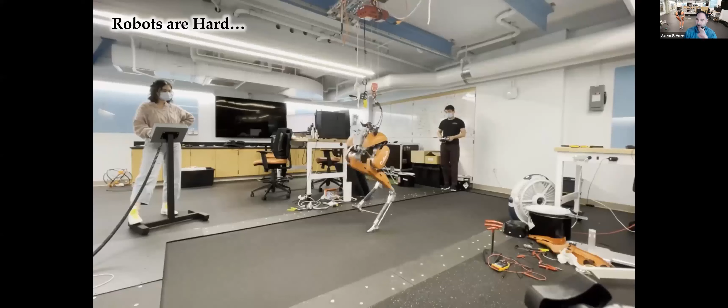And this is just some of the outtakes testing on Cassie. Either Cassie falls apart or Cassie steps on itself, or just things start falling off it. And they're just really difficult. Both, these are mechanical failures. There's also, of course, a plethora of algorithmic failures. Those are, in fact, the predominant failure mode. And the bottleneck in robots is the algorithms we're deploying on them.

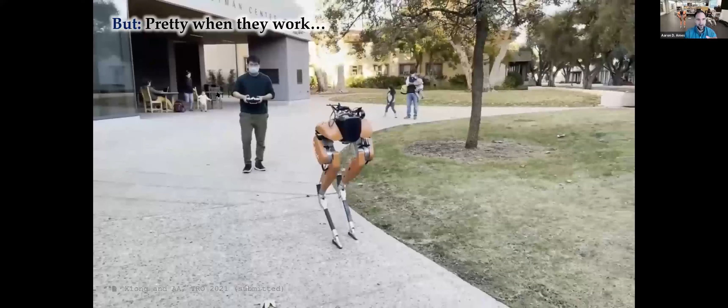But it's cool seeing where you can ultimately go with these things when everything works the way it should. It's also cool seeing kids' reactions. There's a little shot here of a kid just running around the corner trying to track down the robot, super excited about it. So kids love robots. All right, so that's kind of the lesson here, is they're hard, but they work.

So what's the challenge? Well, the challenge is really to make them work every time, all the time, properly. I think of this as our canonical application space in terms of getting things to work all the time. So Mars.

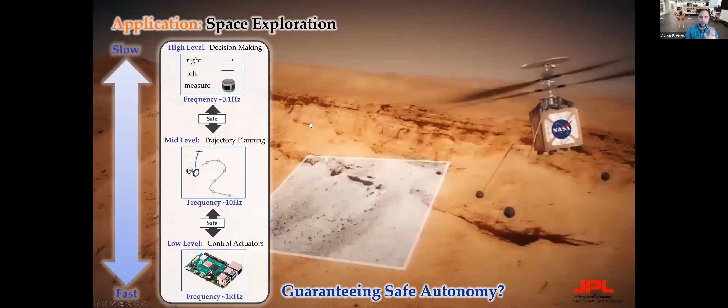I had a project with JPL on this coordination between the rover and the helicopter. It's not on Mars, but it was a proof of concept study for perhaps the next mission. The idea was, we're developing all these autonomous behaviors on this system. How do we know that when we deploy them, they'll actually work the way we intend?

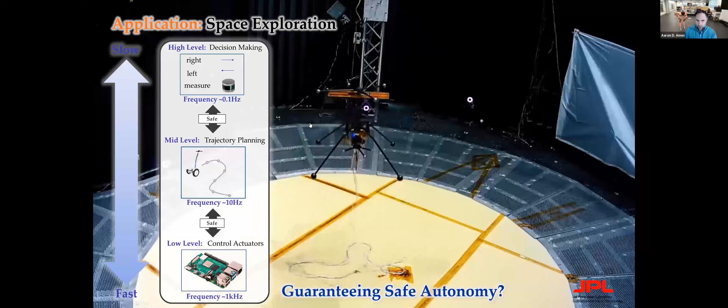In this case, we can't do what I did in the previous video, where we can test in the lab a bunch, work out the bugs, and then make sure it works and deploy it. So in this case, you have to have it right the first time without the ability to test in the real operating environment. So how are we going to understand this framework?

Well, the hint is here. There's really two themes in this talk. One is safety critical control, which you're going to see throughout. But the way to frame safety critical control in a broader context is through these multiple timescales present on systems. Often in robotics and control, we focus on individual timescales.

So we might be an expert in low-level control. We love dealing with x dot equals f of x. We design controllers for these low-level control systems, and that's our focus. That's great, and there's a ton of work to do there.

Or perhaps we're interested in formal methods, or discrete abstractions, or MDPs, or planning, or RRT, or whatever your favorite sort of discrete representation tool is. Then in that case, you're kind of focused here.

The reality is, to get to this level of autonomy, we're going to have to cut across these layers. These layers are not only varying between continuous and discrete, with the plant being the most continuous object and the planning being the most discrete object, but they're also varying between timescales. Typically low-level control and the plant itself operate at a much faster rate than the high-level decision-making.

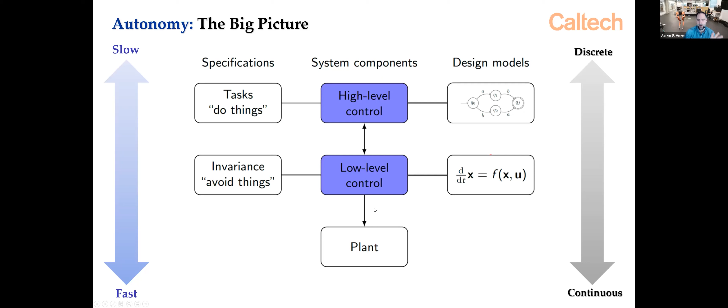So the question is, how do we pull all these pieces together and start to think about robotic systems in a holistic way, with a special viewpoint towards safety critical control? The goal of this talk is to understand this and parse it up in a couple of contexts. I'm going to show a bunch of different applications of these pieces coming together.

This is still an incomplete picture, meaning this is very much an active area on how to pull these layers together. It's a daunting task, because you're pulling all these different disciplines together in some holistic way. But the common theme is to make guarantees across layers—specifically formal guarantees with respect to safety, across these layers in a unified way.

By doing that, we're going to be able to consider a variety of application domains, from walking robots, robotic systems more generally, all the way to robotic assisted devices, which will be the end of this talk. And then everything in between, being things like multi-robot systems and safety critical systems.

So the idea is to cover these two axes, where we're talking about safety in a variety of robotic systems, and the different timescales where the safety is operating, and how these integrate together in a holistic way. That's where I want to go. To start out, I'm going to start where I'm the most comfortable.

My background, my passion, is this low-level control. I love the clean statement of: you have some dynamics, it's an ODE. What can you say about this nonlinear system? The key tools to do this, that I'm going to talk about briefly here and go into more detail on,

especially on the barrier function front, is we usually use things broadly called certificates to verify the properties of these systems—things like Lyapunov and barrier functions, where we have a property, we want to verify it on this low-level controller, or this continuous dynamical system. So how does this look, and what does this look like?

More importantly, this will be the first chunk of the talk, but then I'm going to start transitioning into: once we understand this a little bit, how do we start to take these ideas up the chain? That is, apply similar methodologies or thinking, even if the problem descriptions are very different.

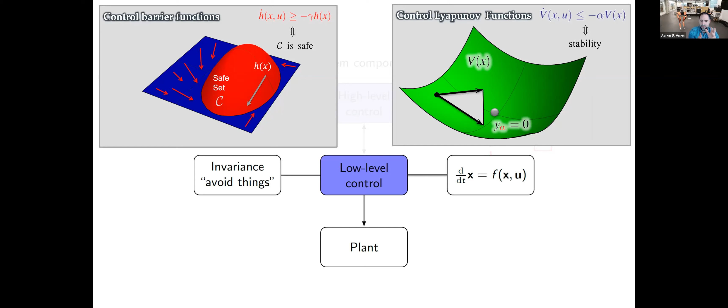All right, so to begin with, let's start with Lyapunov, because I think this is the cleanest instantiation of what we do in control, and really a great representation of robotic systems meets control. Lyapunov, of course, I imagine most of you are aware, is an old concept from 1892. Lyapunov formulated it, and the idea is super simple. I'm actually not going to talk about Lyapunov functions, because I'm interested in control systems, so I'm going to talk about control Lyapunov functions instead. This is a more recent concept, 1989, a la Sontag.

The main idea in Lyapunov theory, and any kind of Lyapunov-like representation of a system, is to come up with this low-dimensional certificate of the property that you want. So what does that mean? Well, you start with some nonlinear dynamics, and those nonlinear dynamics are potentially really high dimensional. So x dot equals f of x. X could be living in 50-dimensional space, 100-dimensional space, the dimension doesn't really matter. We will assume an affine structure to this system. That's really important—it turns out that's not a strong assumption because robotic systems, for example, have affine structure.

And then what you do is you consider a Lyapunov function. This has two key properties. The first is that it's positive definite—in this case, a bit stronger than positive definite. It looks like a bowl, like a quadratic bowl. The second thing, and this is really the key notion, is that if this function decreases along solutions in a very specific way, then you can guarantee properties of the system. The way we want it to decrease along solutions relates to the property we care about showing.

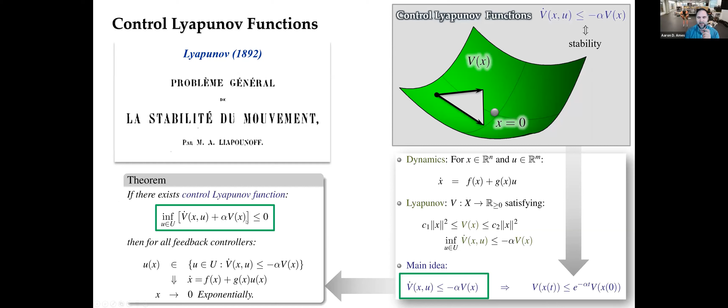Why is this so important? Well, then you can start synthesizing classes of controllers, and you can start to optimize your controllers, at least point-wise. For example, you can take a quadratic program, where given any other controller in your system, this u-desired can be anything you want. You might want to match that controller subject to the stability constraint. So that u-desired might be a joystick command from a person, or it might be tracking a trajectory from a planning algorithm. And then you want to enforce stability in the constraints.

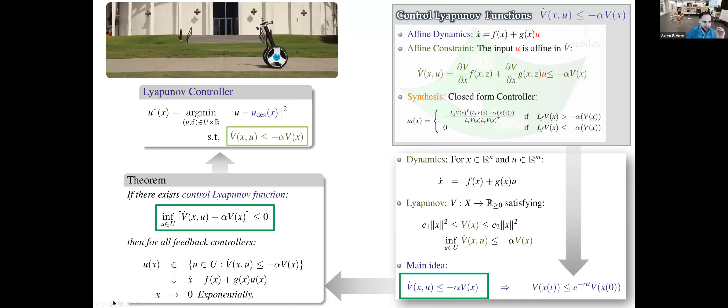Because of the affine dynamics assumption, this V dot condition, as you can see on the right there—let me get my laser pointer—there we go. So this V dot condition is affine in U. Hence, this is a quadratic program, and in fact this has closed form solutions, which can be really simply stated as conditional statements. So that's the idea. This is actually this controller implemented on the Segway verbatim, meaning we're actually doing torque control using this—evaluating this quadratic program online. So that's the idea, and we've had a lot of success with this methodology. We've applied these ideas, at least broadly speaking.

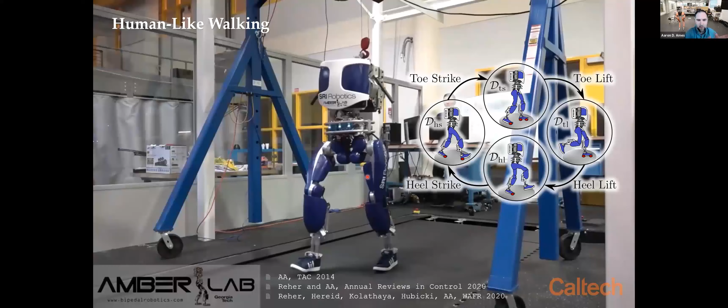The implementation details are not exact. This isn't running the QP in real time on the robot. We actually use the QP to generate trajectories that we then tracked on the robot via PD control. Those subtle details are not hugely important right now philosophically.

Because the idea is, regardless of this, we're able to take this formal perspective and apply it to guarantee stability formally and practically realize that stability on really complicated systems. This is an older video, actually at Georgia Tech, and I love it because of the multi-contact walking we got. This is a 4-domain hybrid system, and we have Lyapunov functions associated with all these domains, and we get exponential convergence and proofs of stability, and the end result is this nice walking behavior on the system.

The other important point is that not only can we do this on walking robots, and I'll show some other examples later, but these ideas, because we're framing them generally, can be applicable to a wide class of systems. So this is the same methodology applied to a quadruped. This is a bit older video now, but I like it because it's very clean and simple.

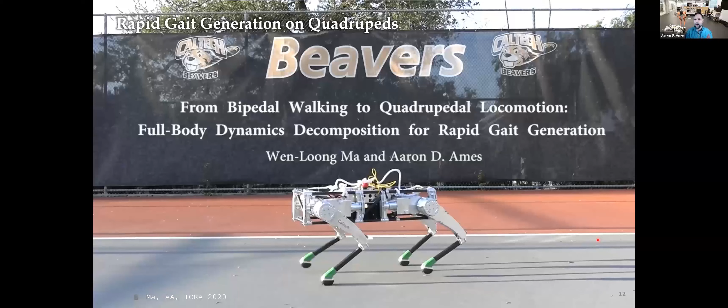The idea is super simple, where you take your quadruped, you break it up into 2 bipeds. Effectively, mathematically, you can do this. You generate walking gaits for those bipeds and make sure this connection condition is satisfied. And we can generate walking gaits using the full dynamics of the quadruped in around, in this case, 2.58 seconds. That gives you this gait. So this is the power of taking this holistic approach.

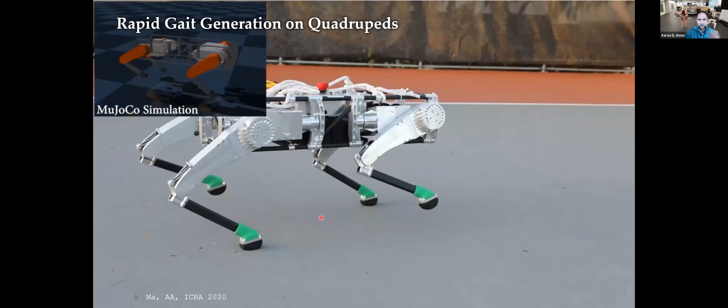Again, I'm pushing a bunch of details under the surface here. I recommend you check out these papers, but that's the idea. And it isn't then restricted to a single quadruped. In fact, we've done this on a bunch of different quadrupeds.

This is the same one, but now doing a robustness test. This root system, you'll see this a couple times in videos. This is actually right outside my office. This is sort of our true test of robustness, is make the robot walk over this. These are really deep roots, like 3-4 inches deep at points. So it's surprisingly difficult for robots to handle, and we can handle that robustly.

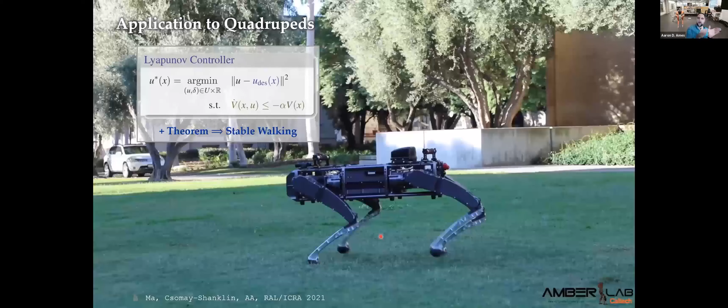We can also put this on other quadrupeds, like I mentioned. This is the next generation Ghost Robotics quadruped. Interesting story is that the previous one, we were working for a deadline, and that robot broke about 3 days before the deadline, before we had any experimental results.

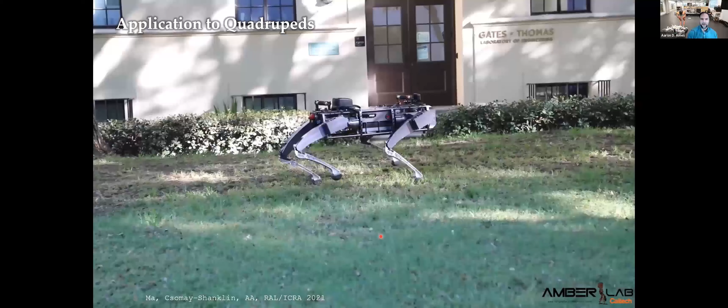We sort of like, what do we do? The students said, well, we're going to try it on this new robot. They hadn't put any of our algorithms on it. Again, we're generating all of the walking gaits on this, all of the real-time controllers, everything, from scratch, and my students hadn't touched this robot yet. They said, I think we can do it. In one day, they got it walking, got the robust gaits, took the video, wrote the paper, out the door. There you go. It shows how when you do things generally without hacks, they work much faster in the end. And there's a lot of groundwork to get to that point. Don't get me wrong, a lot of infrastructure we already had in place, but that's the idea.

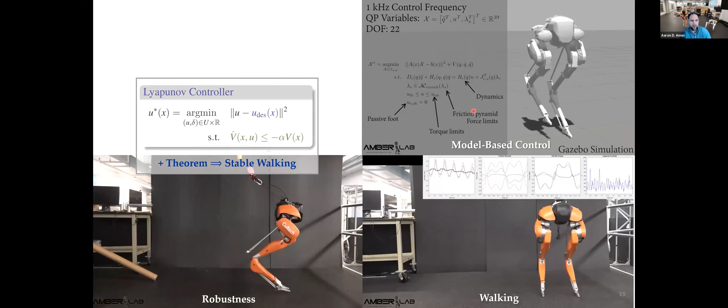We're able to do a variety of different walking behaviors, forward, backward, side to side. We can even walk outside with these controllers. So this just kind of, again, I'm trying to illustrate this process, at least at a high level, of going from the math and the theory down to the robotic system.

So these are just some other fun videos, samples of other things we've done.

We can do robustness tests, we can do jumping, we can do fast walking, we can track trajectories. So we're starting to expand out the capabilities of these robotic systems beyond just here's a great video of it walking in the lab, or walking on grass in a very specific way, but rather, how do we make these things more general?

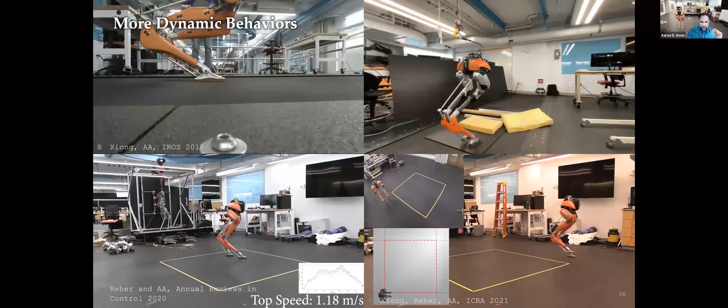Meaning we can actually deploy them in interesting scenarios. And what you find when you go to deploy things in more interesting scenarios is that you often miss things, right? No matter how good your math was, no matter how robust your walking is, there's always these edge cases that mess you up.

This is an example here. So that's that same robot system I mentioned earlier. Now you can see it's a little bit, top-down view gives you a little bit of the depth. And what happened here is the robot's actually doing well. It's dynamically balancing fine, but it ultimately hits itself. So it has a self-collision trying to catch itself, which topples it.

So stability is not enough. That's the lesson here. Stability, this is all stable. That's fine. We didn't violate the stability property per se. We ultimately did, of course, but along the way, we violated a different property that is in some ways intrinsic to having stability, and that's safety. That's staying within a set. So what we need is a more general notion than just stability to really make these robotic systems safe.

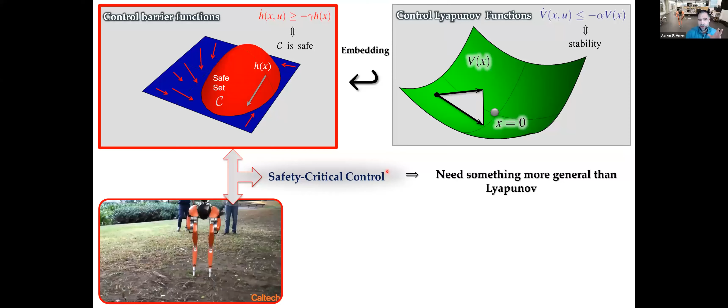And so this leads to safety critical control, and specifically control barrier functions. So these control barrier functions are actually a relatively recent invention from 2014, but as with every invention, they build on previous work that spans a long period of time, and the notions underlying them can be traced back to 1932, 1942. This is really the hallmark paper by Nagumo.

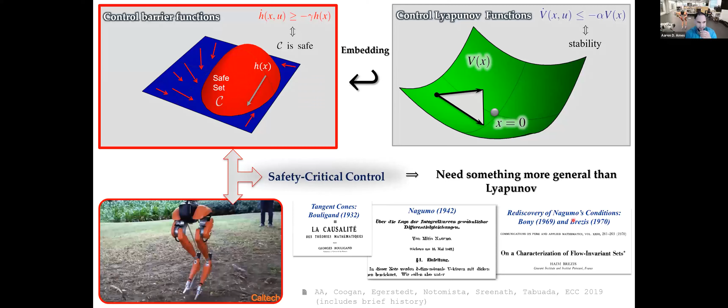And interesting enough, this paper where he gives necessary and sufficient conditions for set invariance, I'll talk about in a second, was lost to the ages on multiple occasions. It was rediscovered by Bony and Brezis in the 60s. It was rediscovered by Prajna at Caltech in the 2000s. So it's been this thing that's been sort of rediscovered multiple times, but because the result itself is so fundamental.

So now we'll talk about set invariance. So now things get interesting because now we're talking about newer stuff. And new, by new I mean a la about 2014. And this is work with Paulo Tabuada and Jesse Grizzle.

And so the idea is, the setup here is we just formulated this notion of a CLF-QP that I showed you earlier. And the question then was asked of us actually was, okay, so now that we have this notion of a whole wealth of control inputs we can pick, what can we do with this in a powerful way? How can we exploit that structure?

And the answer, the idea was, can we think about set invariance and safety? That is, in this case, it's illustrated here, is we're not so much worried about the stability of the system. Sure, it has to be stable, but there's lots of controllers that can make it stable. The question is, given any of those controllers, whether it's a Lyapunov controller or maybe you're just doing an LQR controller, how do you keep it safe within this region regardless of what the controller is?

And so by safety, I mean the following: we have some safe set C defined as a super level set of this function H, the zero super level set of H. So this is sort of understood as here's your safe set, meaning this ellipse. And the function itself is maybe this bump function, which when it's positive defines that ellipse.

And again, going back to the history for a second, Nagumo in 1942 gave necessary and sufficient conditions for forward set invariance. So this is really the key concept that we're playing with here is forward set invariance. Why? Because safety is staying within this set C. So that means you're safe if you stay in that set for all time. That is, if your system is forward invariant with respect to that set.

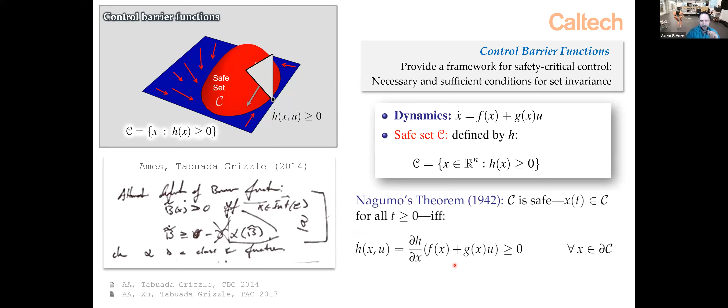So what's the answer? Well, the answer is to modify the right-hand side of that by a little bit, just change it a little bit. And the change is this is a class K function. Actually, importantly, it's an extended class K function minus, but think about it as a constant if you'd like, times H. And what does this do? Well, this degrades, not in a bad way, but degrades to the condition on the boundary when you're on the boundary. So on the boundary, H is 0.

So H dot is greater than or equal to 0, and we recover Nagumo's conditions. It turns out you can prove this not even using Nagumo. There's other ways to prove this as well. This is a nice paper that I have with Sam Coogan on this.

But inside the set, what does it say? Well, if you're inside the set, H is positive, which means this whole term is negative, which means H dot can go negative, which means H can shrink. So that means that inside the set, you can actually approach the boundary. But as you approach the boundary, that shrinkage gets lower bounded ultimately by 0 as you get to the boundary, hence it keeps you in the set.

So it's a really simple Lyapunov-like condition, but that simplicity, and this is it in action. This is a system, actually experimental results of a system doing this, where it gets all the way to the boundary and the barrier function sort of pushes it there, and then the system dynamics pulls it back in.

So that simple condition, though, gives you a theorem that's very similar to the Lyapunov theorem, where once you have one of these control barrier functions, you get an entire class of controllers that renders your system safe. Any controller that lives in this set defined by this inequality will keep the system safe. And then just like with Lyapunov, that allows you to synthesize controllers. But now this is actually a much more relaxed and flexible controller even than the Lyapunov controller gave us.

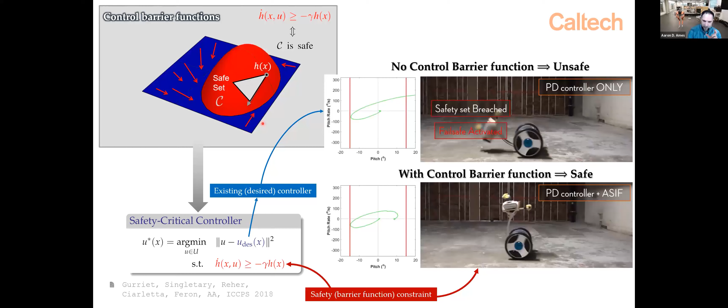You kick it, it overshoots, it falls. On the bottom, that PD controller is filtered by this safety filter, this barrier function, this QP, which keeps it within this set. The way to think about this is: you're given whatever controller you have, and you pass it through the safety filter, which is just this QP, pass that to the system, and then you modify the system in such a way that you get safety.

And that's the theory behind safety in 5 or 10 minutes. Now I can show you some applications of this, because this basic idea turns out to have been quite powerful. I hate to say it that way, but it works really well in practice.

Let me tell you one more theoretical thing that's interesting and conceptually important: it turns out that Lyapunov functions are specific examples of barrier functions, not the other way around. So we have a set inclusion of the class of all Lyapunov functions within the class of all barrier functions. In particular, Lyapunov functions correspond to barrier functions where your set is a point. That's important for a couple of reasons. One is it says we've expanded our conceptual viewpoint of Lyapunov, though these are all Lyapunov-like conditions.

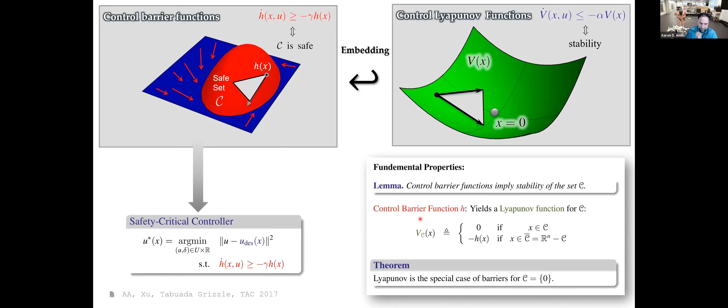Let's think about some applications of these ideas. We've been working on this for a while now, and there's a bunch of collaborators I've worked with, including people at Georgia Tech - Magnus Egerstedt, Eric Feron, also Sam Coogan recently - people at UCLA, Paulo Tabuada, people at Michigan, Jesse Grizzle, Gabor, also some companies, ETH. So there's a whole bunch of people I've worked with in this context, and I just want to show off some of these applications.

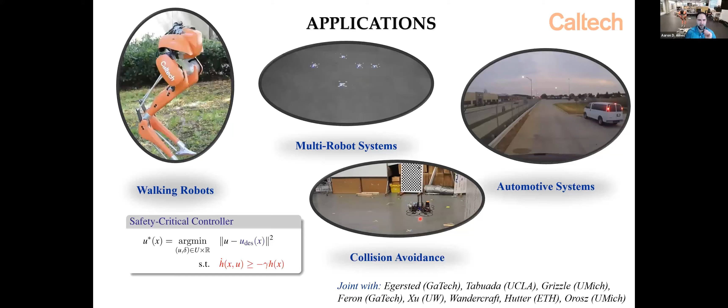The first application - this is actually my postdoc's experiment, he's now at NVIDIA, and we have a paper with some of the math in it also cited there. But this is just a cool example because it shows barrier functions in a very visceral way.

What's happening here is the barrier function keeps the car in a lane. The human is the desired input, and the human is trying to steer the car outside of the lane. The steering wheel on the left is the barrier function. You'll see there's a mismatch between the human and the barrier function because the barrier function is keeping you in the lane, even if the human's trying to mess you up. So that's filtering through, and this is even in snow - this was taken at Michigan, obviously not California.

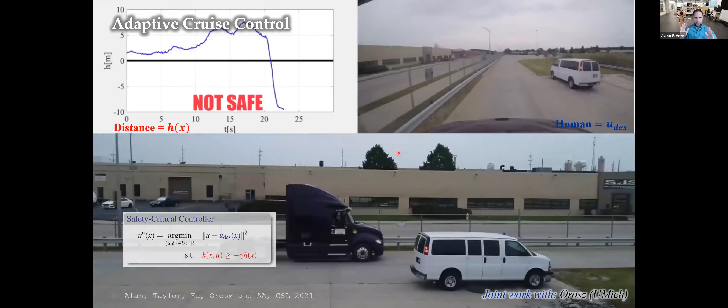More recently, we did a very similar thing with Gabor. This was also in Michigan, on adaptive cruise control. In this case, the goal is to keep a minimal distance - it's actually a time headway - between the lead car and, in this case, a truck. This is a full scale, big rig truck. And this is running barrier functions.

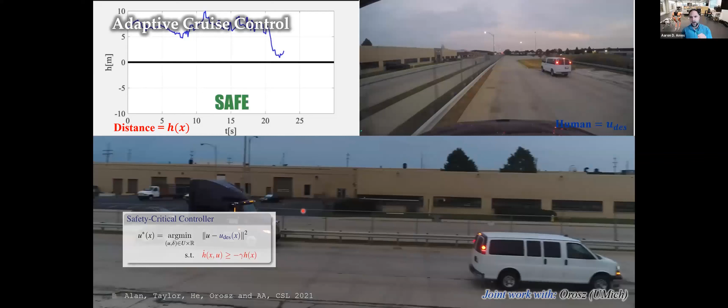It's not just running a nominal controller - it is going to run barrier functions, but this is running sort of nominal controllers too. It turns out that if you use barrier functions as context and filter these controllers, even though we're using a really simple, low dimensional representation of the system to synthesize the barrier, as long as we couple that with something we call tunable input to state safety - I recommend you check out this paper - we're able to guarantee safety, meaning these things don't crash, even though we have this super complicated big rig truck with all these dynamics we're completely ignoring, and it works. This is the safe distance that we get in the end.

So those are two car examples. The car examples can actually be put together into a single example, although this example predates the car examples. In fact, this was one of the first experimental examples of barrier functions in action, done with Magnus Egerstedt at Georgia Tech, on the Robotarium, or a precursor to it.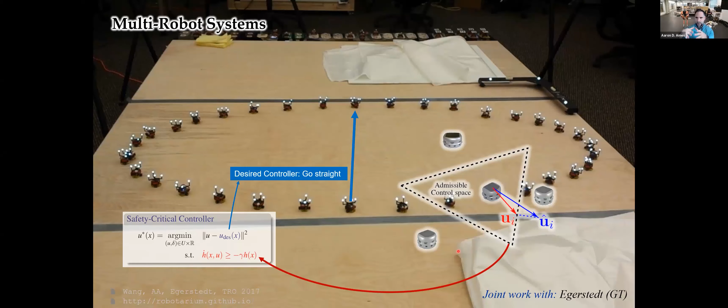In this case, we have a bunch of mobile robots. Think about this as a combination of lane keeping and adaptive cruise control. You command these mobile robots to go straight across the room, and all the robots are being commanded the same way. So the reality is they'd all come and collide simultaneously in the middle, causing a massive crash. Instead, you take a barrier function that makes sure there's a distance, a buffer set around all these robots. It's a little more complicated than that, but that's the essence of it.

You implement that through the control barrier function, and this is what happens. They're all heading to this crash point, and then the barrier function starts taking over. All of this behavior you're seeing is purely a function of the barrier function. It's like they have virtual force fields around them, rolling off each other until they're able to move and spin around to get clear, then continue to their destination. The key point is that none of this is planned - we're not planning these trajectories around each other. This is just a purely reactive controller that gets you safe in the end.

The same idea, albeit with more complexity since we're using nonlinear dynamics and differential flatness, can be applied to drones. This was also work with Magnus, and Li Wang was the student who led this effort. In this case, Li Wang is trying to drive this drone into these other drones, which are autopiloting, and the barrier function is what's preventing them from colliding. This was a great demonstration from about 3 or 4 years ago.

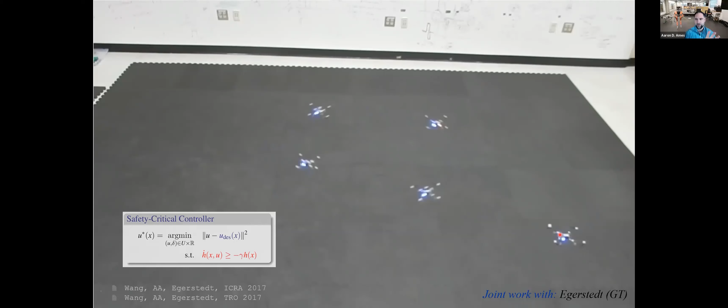The question is, can we push these things into a context with more realistic scenarios? In this case, we're in a room with motion capture, everything nicely constrained. Well, it turns out we can, and we have - this is a drone doing collision avoidance, meaning don't hit this thing in front, but using an onboard camera now, so onboard sensing. When my student here, who led this effort, takes away the obstacle, correspondingly the barrier function is modified, meaning the value of the barrier function is modified, and the drone gets to fly.

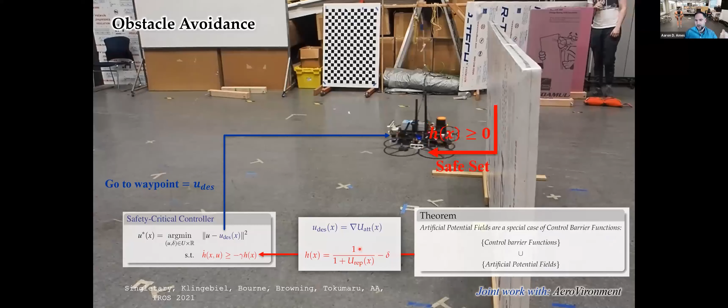I want to note quickly, since I get this question a lot in these talks - what's the difference between barrier functions and potential fields? It turns out potential fields are sort of a very specific case of barrier functions as well. I could go into a ton of detail, but in short, if you have a potential field, you can synthesize a barrier function, and this is what it would look like. Conversely, you can't do it the other way around, because barrier functions are a more general class of systems.

Finally, you can do the same kind of thing, but now we have a human controlling this drone, and the onboard sensing is detecting the obstacles and avoiding them as it flies through this kind of maze, filtered by the barrier function. So those are 2 examples.

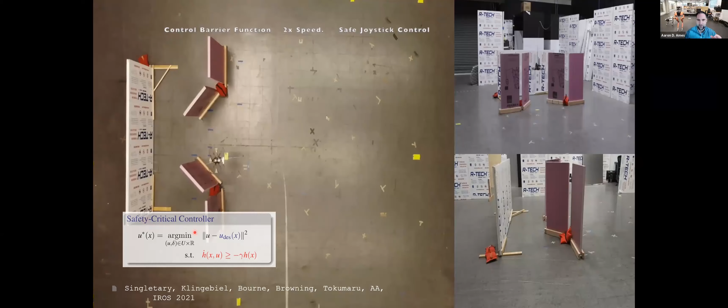You might say, this is cool, okay fine, now you're not using motion capture, but you're still in the lab. So we have a recent video that I think is really cool, where we've gotten rid of the lab too. Now we have a drone flying outside with onboard sensing, onboard computation, doing control barrier functions in real time.

They flew this around the Rose Bowl, so the setting's pretty awesome. But anyways, this is showing that we really can do this stuff in practice, in a practical context, like outside the Rose Bowl, and implement it in real time.

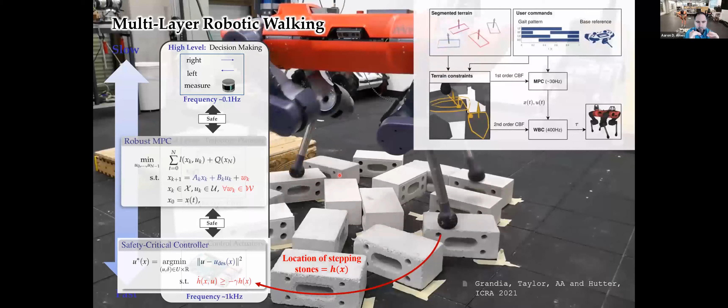Okay, so now I want to switch gears. I'm going to go through a bunch of stuff now. I've got a lot more videos to show, but the level is going to get a bit more abstract, high level. And the reason why is I want to communicate a broader sentiment. Now that we did some detail on the math, the question is, what do we do with this, and how do we really bring this together in the context of autonomy?

To give this some context, this is the application of barrier functions on a quadruped for stepping stones. So this is actually the first implementation of barrier functions on a legged robot.

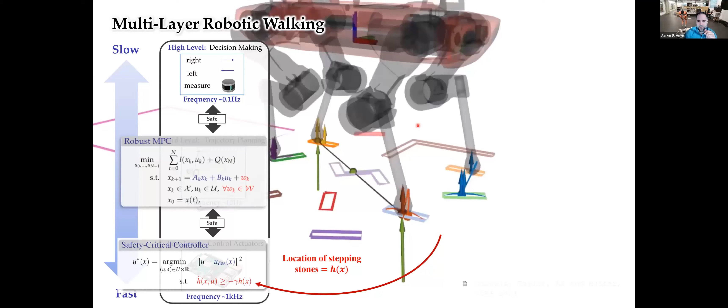What it's doing here, this is the sim results, but it has a nominal walking gait, and the barrier functions are modifying that gait to make sure it can step on these stones and won't fall between them. So the location of the stones defines all these barrier functions.

And the important point here is, to get this to work really robustly, we not only did the barrier functions at the real-time control level, but we also did it at the MPC level. This robot, joint work with ETH, uses MPC based on some reduced order models to plan the walking gaits, and we also implemented barrier functions there in essence.

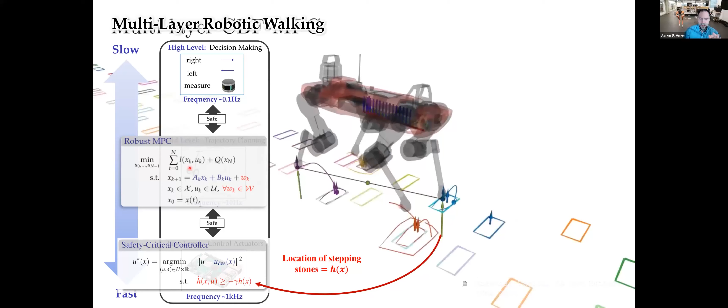So what this is pointing to, and the reason I'm showing this, is it's cool that these barrier functions are working, but it also shows that to get these really complicated systems with complicated behaviors to start to be safe, we can't just do barrier functions at the real-time control level. We have to start to bring in slower control methodologies. By slower, I don't mean in a bad way, I mean at the level of planning and decision making.

And so this sort of leads back to this big picture I showed you earlier. I've covered this low-level control front, not to say I've solved all the problems, but I've at least set the stage as to what you can do in that context. So the question is, how do we understand this in the broader context of how we fuse this with high-level control, with planning, with everything else?

So I'm going to give you some samples of what we're doing here. A lot of this is still work in progress, and we have papers on it, but it's still a framework that's starting to gel. You'll see that a little bit in how this comes across.

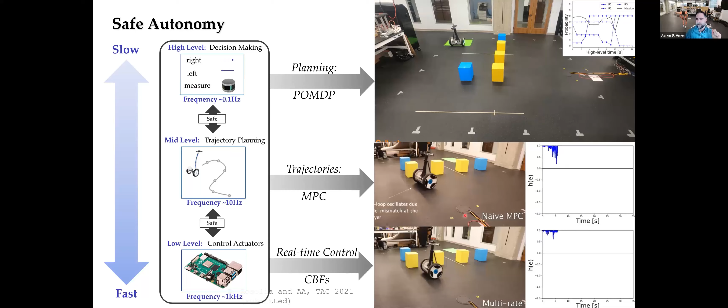And it has the properties we want across all of these layers running at all these different timescales. So why is that important? Well, it turns out this was motivated, and I'll show some other examples of this in action, but this was motivated exactly by the Mars 2020 mission. In fact, this started with work with JPL, where the idea was how do we coordinate between the Mars rover and the helicopter, and the answer was, let's do MDPs, Markov decision processes.

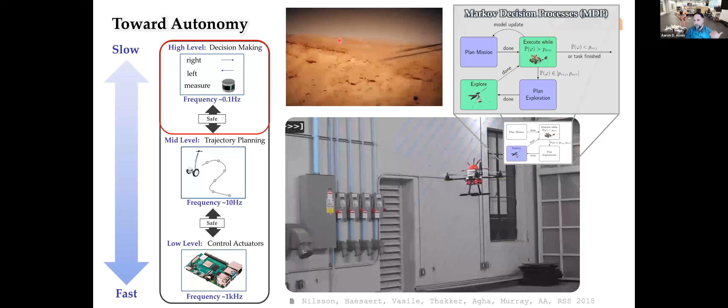And this is what we did, and we were able to do this mission coordination. We even demonstrated experimentally, where here's our rover and here's our helicopter. But what happened in doing this was I realized how inherently fragile all of those planning methods are when they don't account for dynamics, which they typically don't.

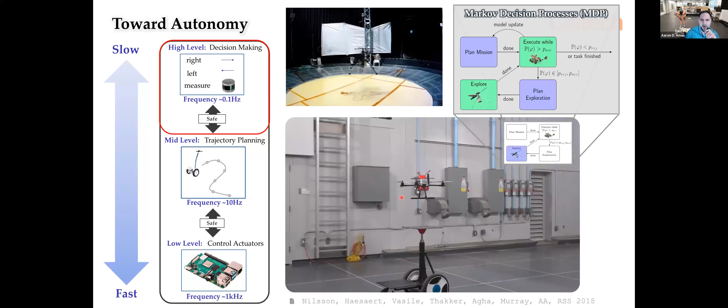And I don't mean that as a slight to people that do these, I just mean that they typically don't, because it's really hard to think about dynamics and do planning all at the same time. And when I say fragile, I mean the following: it turns out this worked, but worked one time out of about 150 trials.

And every other trial we kept having issues with dropped sensors. We were using motion capture, and that would drop, and our drone just kept spinning off because it was losing sensor signals. Everything was just, we didn't have the right real-time controllers, and this thing kept crashing into the wall. My students actually rebuilt the drone so it could fall apart and they could rebuild it quickly, because it was breaking so much.

So what does this mean? Well, we need to bring these layers together. This is what I'm sort of hinting at, and we have results doing this. I'll be brief, but as a quick example, we can take these POMDPs, and it's well known, actually going back to Calin Belta and others almost 10 years ago now, that you can represent these POMDPs as discrete time dynamical systems, meaning this discrete planning layer can be represented as this dynamical system.

And once you have that representation, you can replace it with a discrete time barrier function on these discrete time dynamics, and correspondingly come up with safety filters for POMDPs. So here we can enforce safety in that context. And this is what this looks like on a multi-robot system example. Again, the point I'm making here is at the planning layer, we can start to enforce safety.

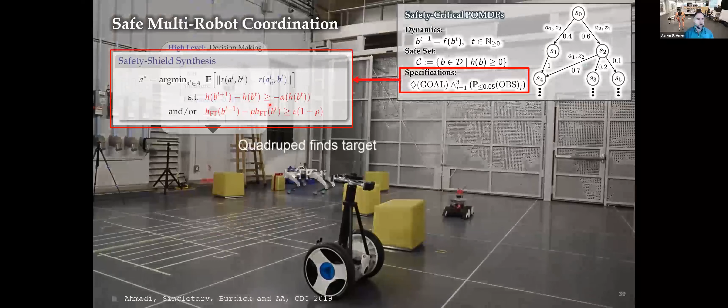And we enforce safety conceptually in exactly the same way we enforce safety at the real-time control layer, except all these things mean something very different. So we're not minimizing the norm square, we're minimizing the expectation between the reward of one policy versus another, subject to discrete time barrier functions on the dynamics associated with the POMDP.

But we're able to do this in practice, and we're able to start to bring this together. So going back to this rover-drone example, we have the rover and the drone now coordinating. Not only that, but we took away the support structure, so we have a drone and we have the rover here as an inverted pendulum Segway, so it has some nonlinear dynamics of its own.

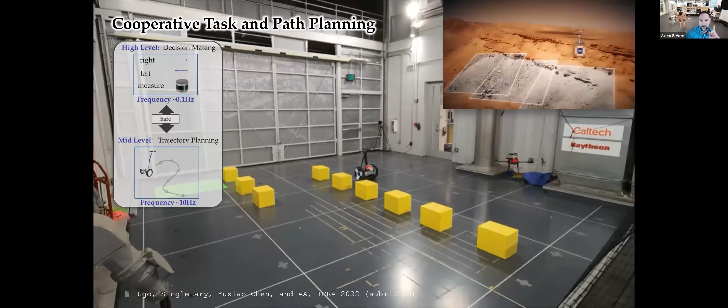And the way we're able to do that successfully is by bringing together MPC with this planning layer phenomenon. So what was missing here, the reason this crashed, is we didn't have the low-level controllers yet in the picture. But the point I'm making is that going across layers makes things inherently more robust.

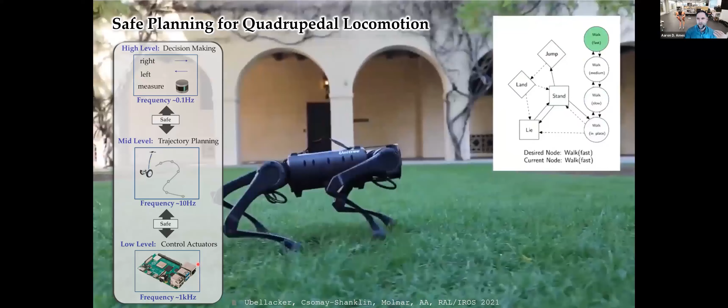And here's another example of this, where now think of this as a planning layer, motion primitives in this case. We have a trajectory generation layer and a real-time control layer, and by pulling those pieces together in holistic ways, we're able to do things like run and jump and everything in much more dynamic ways.

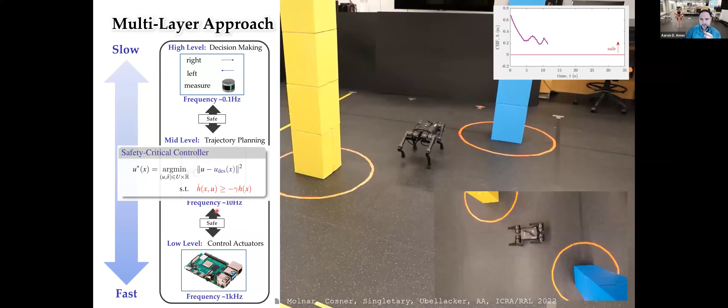The key here is we're no longer doing that using the full nonlinear dynamics of the drone, but rather we're doing that using the layered architecture. So we can implement barrier functions at different points in the layer and use the architecture to guarantee safety across the layers, regardless of the platform.

I just showed it on a drone. The exact same math works on a quadruped to avoid obstacles, because we're now using the structural layered architecture to design this safety critical control method, rather than worrying about making sure we even know the complete dynamics at this level. This can be taken care of by the engineer, in this case my grad student, who developed the walking controls.

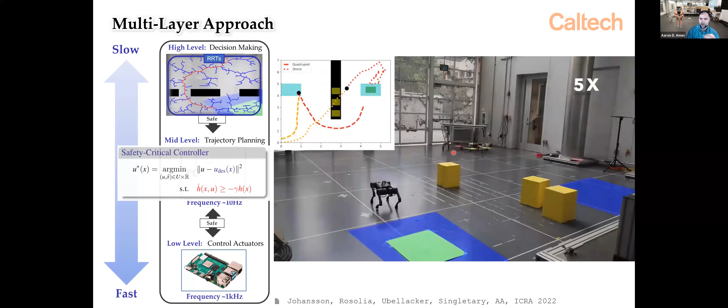One final piece, just to mention briefly, is we can even bring machine learning into the mix here, and I mean that in a very constrained context. In this case, we're actually doing onboard vision and self-supervised learning with an onboard camera on the quadruped. So what we're doing is learning the depth map, and by learning the depth map, we can pass that to the barrier function, which passes to the low-level controllers safe signals, and we're able to do safe interactions, for example between this and a person or obstacles, using a layered architecture, all in sort of a holistic way.

And again, we did this experimentally, doing the experiments on the quadruped. We did it in like a couple days once we had the vision part set. So that's where the advantages of architecture come in.

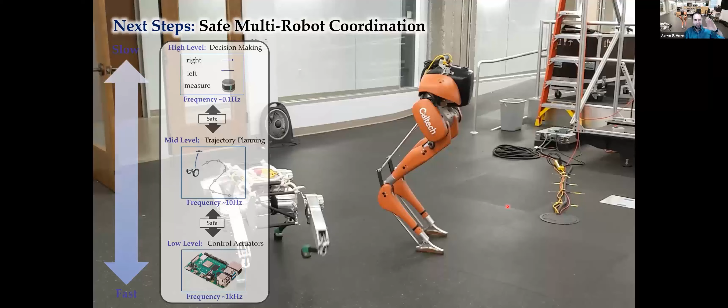So in summary, I think this layered approach is really powerful, especially when you couple it with good control theory at the low level, good trajectory planning at the mid level, good sort of formal methods at the discrete level, and then start to understand the interplay between these layers. And this, by the way, is a contrived video.

This is actually the video that is like the one here. So there's nothing real happening here, just to be clear. This is not a scientific video, it's a conceptual video of what I'd like to do. These were my grad students, they were playing one day, and that's when I took this video - they were just playing with the robots and driving at each other, sort of seeing... it kind of terrified me a little bit. But this is what we want to do autonomously in action.

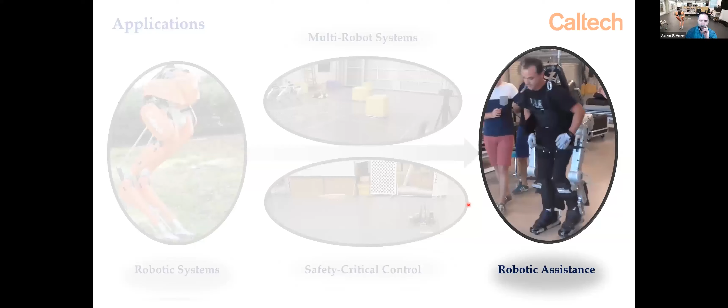Okay, so I have very little time, but I want to pop through one more application domain quickly, because I think it's important to discuss the applications of these ideas to another real world scenario, which is robotic assistance. So I'll just say briefly, if you'd like, how we're attacking this.

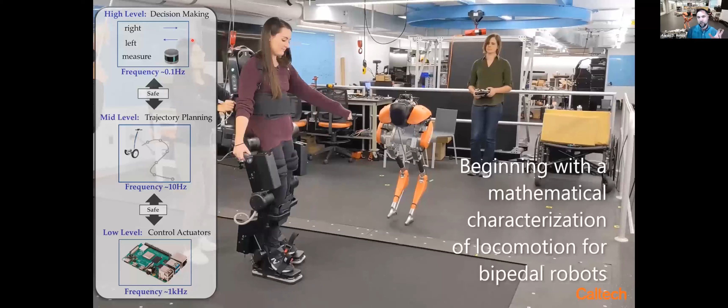Well, we're attacking this by saying, we have these great walking controllers, for example, on legged robots. We also have this layered architecture that's proving to be really effective on robotic systems. So how do we take all this and put it into a new application domain - new meaning for my lab - something like robotic assistance? And we've been successful in doing this now for a couple years.

Just as an example, this trajectory planning layer, which is the way we generate walking gaits in my lab, we've successfully applied to an exoskeleton in collaboration with this French company, Wandercraft. And this is what that looks like. So we're using their hardware, but in essence, our math for trajectory generation - by our math, I mean me and other collaborators. And by doing that, we can generate stable walking for the exoskeleton.

And this is a complete paraplegic using the device. This patient has no function of his legs whatsoever - none of these patients do. And they're able to walk dynamically using the exoskeleton, because the trajectories are generated in a way that guarantees dynamic stability. So that's just pointing to the need to bring this formal approach to other application domains.

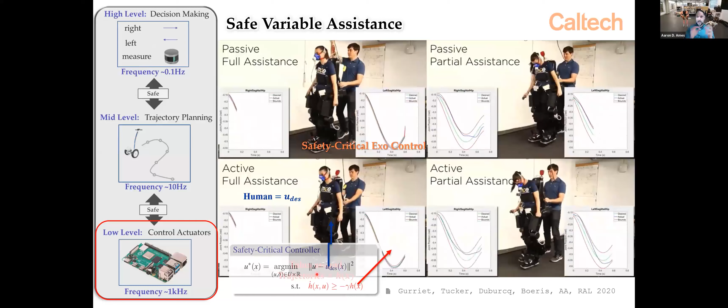We've also done a similar translation at the level of control barrier functions. So we implemented control barrier functions on the exo. Now this was in my lab, and these are healthy subjects, that is grad students, but we're still able to implement barrier functions in a real-time fashion on the exoskeleton for variable assistance.

That is to allow the person to do a little bit of work on the exo as long as they don't destabilize the walking. So finally, we've done similar things with prosthetics.

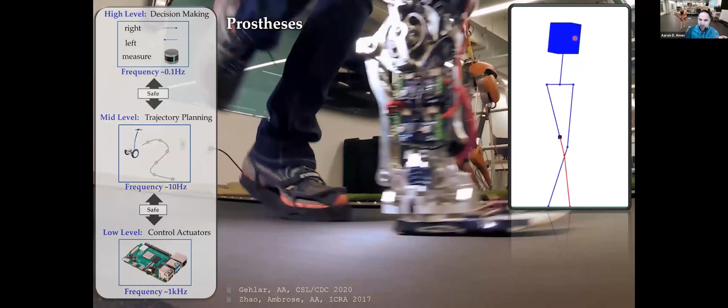In this case, we can do trajectory planning, that is gait generation for prosthetics. We can also do real-time control, that is running the QP on prosthetics, the CLFs, the barrier functions, everything else. And the results are things like this. This is actually running, again, a quadratic program in real time on the prosthetic using a model-based controller.

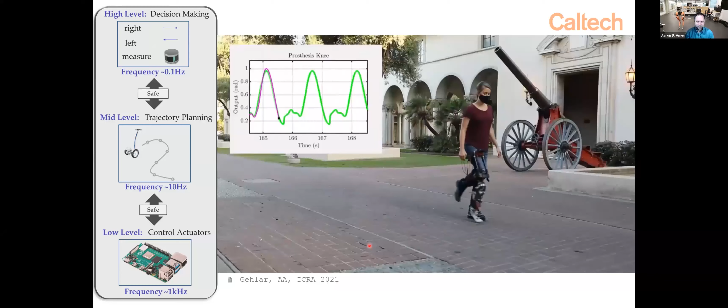In this case, have my graduate student walk outside. This is Rachel. She's done amazing work at this intersection of control and robotics. Again, just under the surface of that prosthetic that she's using is all of the real-time gait generation things that we do for walking robots, the real-time control appropriately modified to prosthetics running in real time.

So that's how we can translate these things over. And we're working on a bunch of other application domains, things like doing real-time sensing, real-time force feedback, bringing some learning of force interactions into the mix. There's a whole bunch of fun ways that we're thinking about expanding this paradigm.

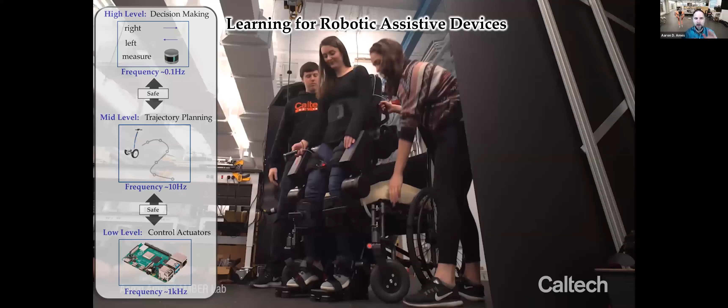Finally, I'm going to briefly mention another way we're thinking about expanding it. I'll be quick here, but I think it's really important: we can also think about bringing learning into the mix in very prescribed ways. This is, again, the exoskeleton built by Wandercraft, but in my lab at Caltech. You can tell this video is taken by Caltech by the production quality. It's a very good video.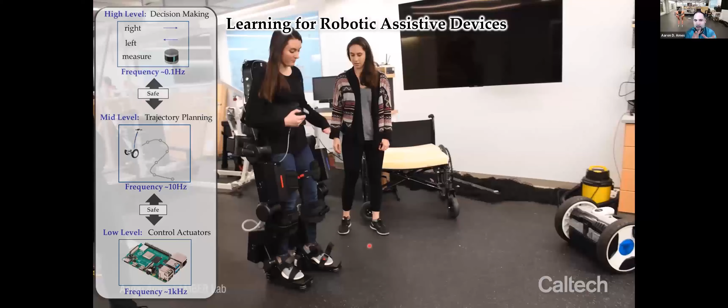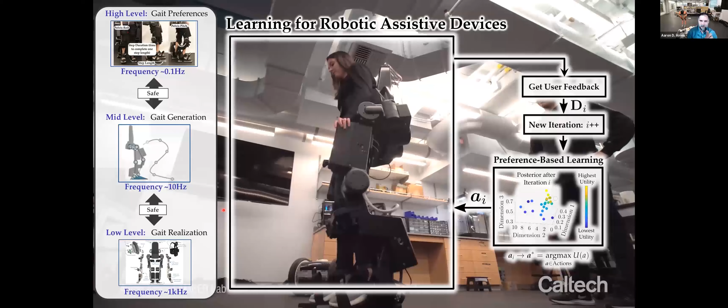But how do we understand how to bring this framework that I mentioned earlier together with prosthetics, together with the fact that we have human subjects and we don't understand what the human subjects necessarily are doing or want? My student, Megan, along with others, has developed this really powerful framework of preference-based learning for exoskeleton locomotion. The idea is, in a nutshell, you can ask the user what they prefer, and you can use this sort of ordered preferences of the user to learn their cost function, if you'd like. More importantly, learn gaits that minimize their cost function, even though you don't know their cost function. So it's learning at this gait preference level, this high level, which we can then pass through these other layers of the architecture to realize on hardware.

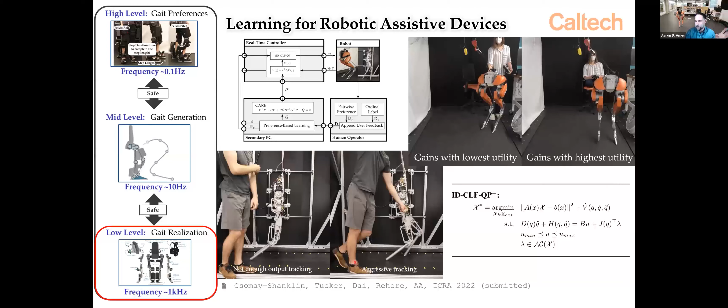Just to show you some examples, we've done this learning at multiple places. We've done it in terms of controller parameter tuning. That is, at the lowest level, we've taken our QP and we can do preference-based learning to determine parameters of the QP that give us the most robust walking on the system.

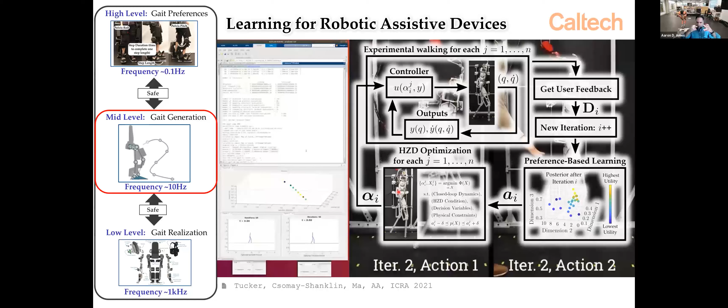We've done it at the level of gait generation. In this case, we're generating these gaits for the walking robot, and then the human person, specifically the grad student, is sitting there saying which gait they liked better when they run an experiment. Everybody that's done experiments has done this before, then picking the one they like best. The end result is we're able to generate really nice walking gaits really quickly using the preference-based learning, even though we don't know the utility function of the graduate student and what they like about walking on a robot. They're just looking at it and saying, this looks like a good walking gait. And in fact, it looks like a good walking gait in the end.

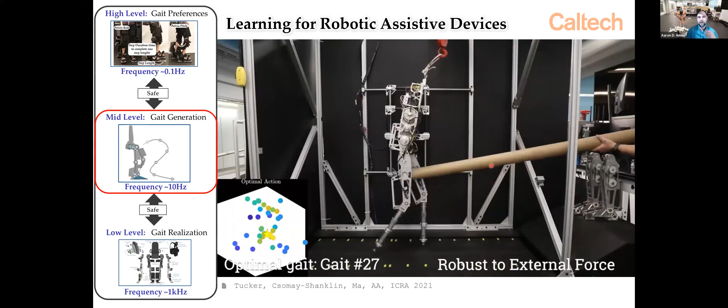Finally, we can do this at the level of human preferences. What I mean is we can pick between different gaits based on feedback from the person in the exoskeleton, using a variety of different walking gaits. We're looking at features and ultimately finding the gaits that they prefer the most. This has been done on a whole bunch of subjects, but let me just show it in action.

This is a complete paraplegic again. This is testing done in conjunction with Wandercraft. So what we're doing now, just to recap, is we're asking the subject when they run two gaits which they prefer. Based on that, we can optimize the gaits through this preference-based learning to find the gait they like best. Again, these gaits are all generated using the same methodology that our walking gaits were generated. The least preferred gait, you can see why it is probably least preferred by the user—it's not really stable, requires a lot of support. As this learning process continues, you get to the mid preferred gait, starts to look a little better. And then finally, we get to the most preferred gait.

So this is what the preference-based learning gives, and it's a dramatically better gait, I think, than the one that it was started with. Again, this is showing this interaction at all these layers together with learning in a very prescribed way to pull all the pieces together.

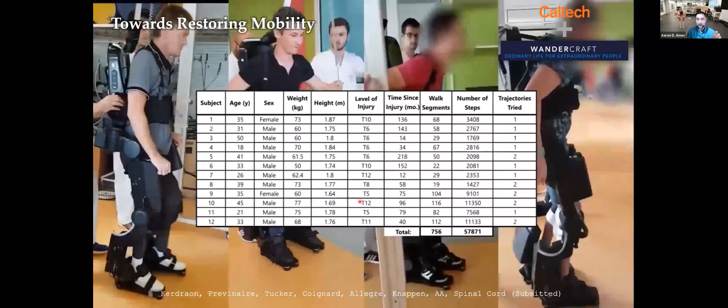Into an application where we can actually use it on real patients. And this idea of heading to real patients is something I think is especially powerful. This is a joint paper with doctors who performed these experiments, the company Wandercraft, where we documented the application of these ideas in a clinical setting with clinicians running the exoskeleton. By the way, just to be clear, not preference-based learning.

This is just the gait generation part, but we want to do the preference-based learning ultimately. So this is kind of ultimately where we want to go, is take these ideas to a clinical setting on the robotic assistive front, meaning all this math should ultimately find purchase in real-world applications.

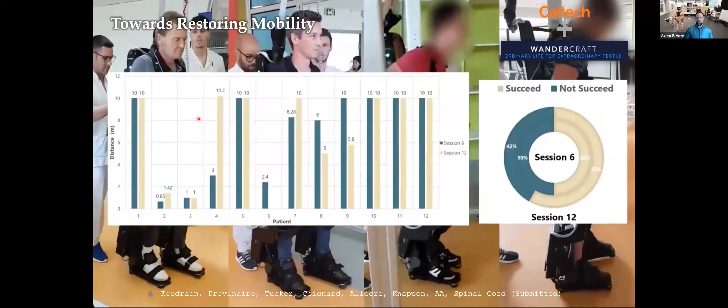And that's kind of the key point, is the math is really the important thing here, not the videos. The videos are awesome to see. By the way, that's that root system I showed you earlier. And now we can walk over it just fine because we've made our methods better. And there's a close-up of the root system, and you can see the robot handling it really well.

The point is, it's through good math that we're able to do this now, not just a bunch of experimental work. So it's math as being the counterpoint. And the math I talked about was things like control barrier functions, multi-layer architectures. And it's really understanding that interplay that gave us the ability to do cool things like get robots into the real world.

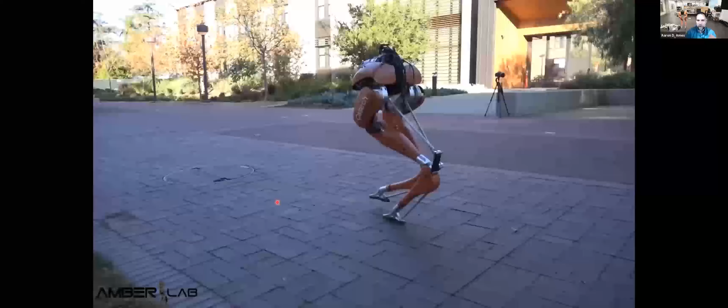So this architecture that we're developing, and the control barrier functions that are really the core, the safety critical things, are the essential part of making things like this happen, where now we have QP-based controls based on nonlinear dynamics and nonlinear control running on the robot in real-world environments, with the result being this smooth, stable walking. And that's ultimately where we want to go with everything we're developing.

So with that, thank you very much for having me.

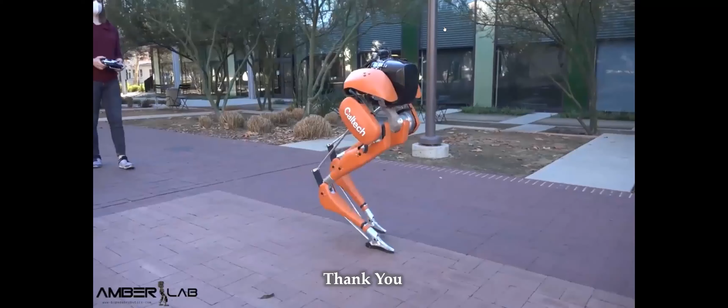Do you ever get into switching instabilities at the border? I assume you're talking about the boundary of your safe set and switching instabilities associated with that. Right, yeah, I was just wondering, like, if that ever happens, at the border, you go back and forth. Let's say, does it ever happen? Or you are mostly, let's say, for example, your drone example, when you were geofencing, right? Does it ever go back and then hit the boundary again, or it moves? Does it, if it happens, is it possible to avoid it? Maybe it doesn't happen and maybe you have observed it, but is it possible for that to happen?

Like, so I suppose, in short, that doesn't happen. Not to say it universally doesn't happen, but the whole point of control barrier functions, and the fact that you're checking the conditions everywhere on the set, means that you have predictive power there. That's what it's doing, right? So meaning that as you approach the boundary of your set, you know you're getting to the boundary because of the derivative condition, and hence you start to modulate your control away from the boundary, not on the boundary.

And that avoids all that switching phenomenon that you would get associated with doing a switch controller. It also avoids the oscillations you get with things like potential fields, because in this case, you're not combining your cost with your safety constraint like you do with potential fields where you combine those gradients, but you just have the safety constraint as a single inequality in the QP. So you tend to not get oscillations on the boundary.

You tend to smoothly approach the boundary and then slide along the boundary or close to it, depending on the situation, and then head back out. That's not to say you never could ram into it—if the operator was taking you back, you could ram into the boundary, but that's about the only scenario where we'd see it. So even if you try to ram into the boundary and through, all that happens is you go to the boundary and just stop.

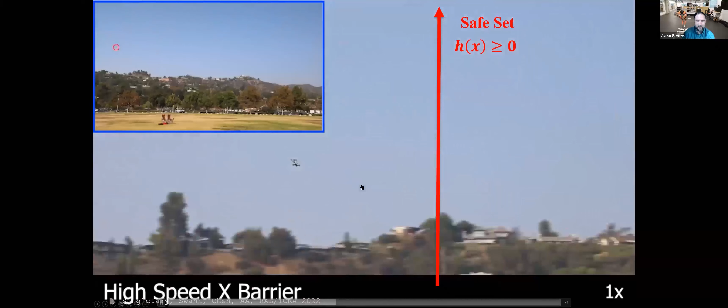This drone is going at like 60, 70 miles per hour. Here's another shot of it—as it gets to the boundary, it just comes up and smoothly stops in this case. And you can see in the plots, it's quite smooth.

And this isn't a one-off. They only did this experiment once or twice, and it just kind of worked. As soon as they got the sensors and everything working, it worked. I don't say that lightly—we weren't having a bunch of bad behaviors that we threw away and just showed this. This is kind of how it worked out of the box. It's very smooth.

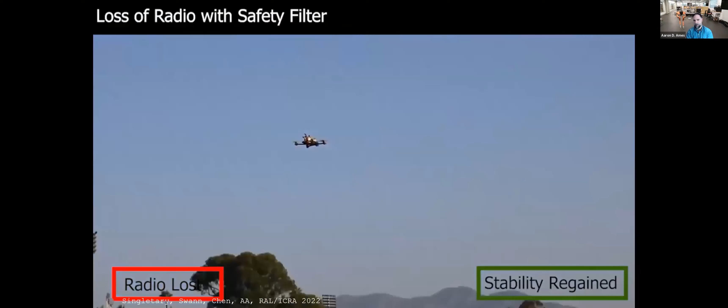That gets to your second point—as your safety constraints change and what they mean changes, of course your barrier function changes. So you have different barrier function representations of different safety requirements. These can be anything from simple ones to handcrafted ones to complicated ones, depending on the application and what you're trying to achieve. That's really the engineering part of it.

I'll say a couple of things. First, by and large, synthesizing barrier functions—as long as you don't care much about input bounds, as long as you're not dealing with the bounded input case which makes things more complicated—is quite easy, much easier than Lyapunov functions, because there are weaker conditions on them. They don't need to be positive definite functions, all that kind of stuff. That being said, there are certainly caveats like input bounds.

In this case, the way we synthesize these barriers is using this backup set notion. It's a bit more complicated procedure to make sure we can satisfy the input bounds and everything on the system. So again, it's application dependent in the end, just like everything in engineering.

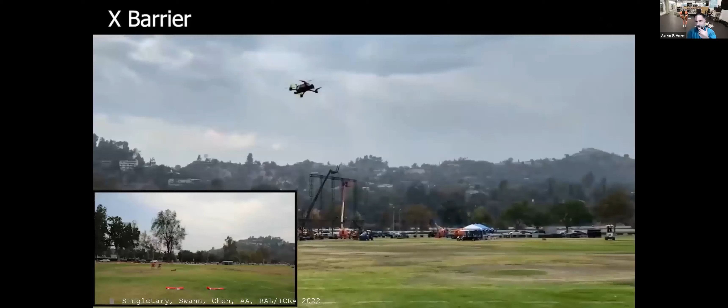There's a ton of good work on automatically synthesizing barrier functions, even from specifications—if you have STL specifications, you can synthesize barriers. That's not my work, actually—that's places like Magnus's work, Dimos at KTH, and others doing great work in that context. So there's a lot of work now on how to synthesize barriers and come up with them, depending on your definition of safety. Thank you so much.